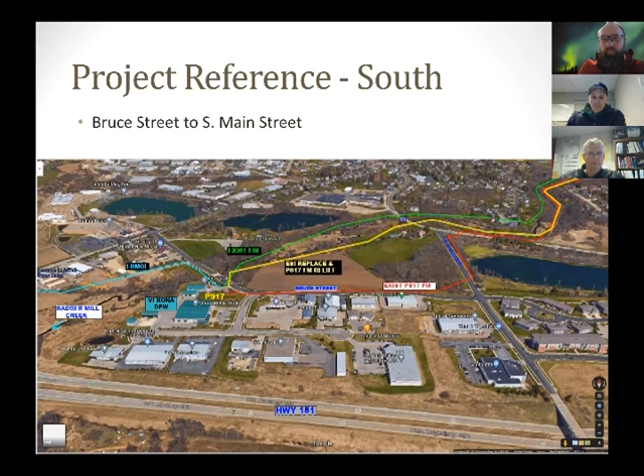And Aaron, I'm going to allow you to take over control here and go over where things are at out in the field. So I'm going to make you the host here, bear with me. There, it looks like I'm the host. Here, let me share my screen.

You should be seeing a marked up picture of the project areas. Starting on the south end, near Bruce Street to Main Street, the Interceptor and the Force Main are complete, except for little short stretches shown in blue. The Force Main needs to be connected to the crossings under South Main Street. As of today, those crossings are complete and were filled with cellular grout, finished about noon. The creek crossings for the local connections have been completed, but once the whole Interceptor sewer is in, they can be connected to the local crossing, so they're essentially just stubbed across right now.

In the next month or so, depending on weather, restoration is planned to begin along Bruce Street and then work towards Main Street. That's seed restoration along the pipe trenches and construction zone, as well as restoring the Bruce Street pavement, putting in permanent pavement and sidewalks. That will include a closure of Bruce Street anticipated for 2-3 weeks, date to be determined.

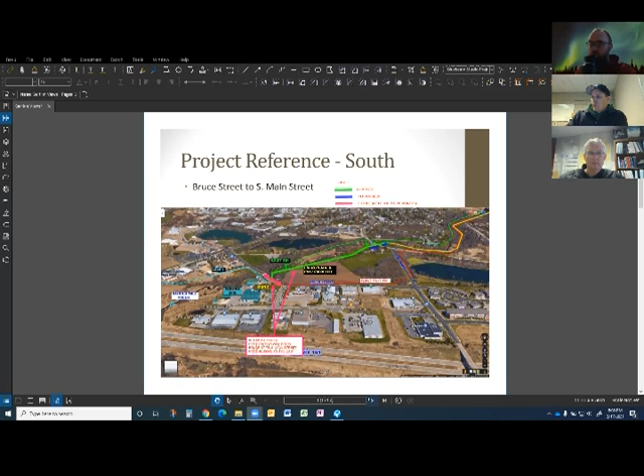As we work north or east from Main Street to Lincoln Street, that's where they're focusing now. Shown in green, that's Force Main and Interceptor sewer that's complete. They have a little bit of Force Main to tie in just north of Main Street, and they're currently working on Force Main in a blue area to catch up to where they have gravity sewer installed.

They are also working on the Melody Circle local connection, placing a casing in the easement area from Melody close to the creek bank or property line. In the next few weeks or so, they're going to cross the creek and connect there. Like the other crossings, they'll make the connection but won't place it in service until the whole interceptor is complete. Moving forward in the next few months, they'll keep progressing towards Lincoln Street, towards the east end of the project.

I anticipate they'll be close to Lincoln Street in about a month or so, give or take. They're still dewatering ahead of the pipe, so they still have a crew placing wells. They anticipate doing that just north of Lincoln Street. And I think that's about it for progress.

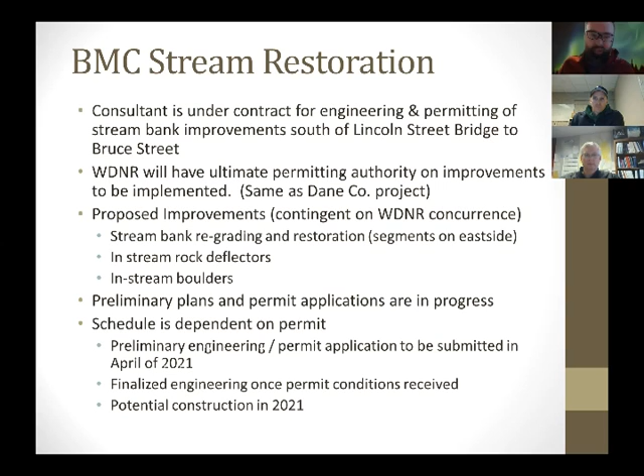Potential construction is hoping to be this year, but that'll be permit dependent and contract dependent and getting authorization to do that work.

The public involvement plan, I kind of touched on that already. Once plans are in place, I'll create a website and upload the plans for input, and then I'll also continue to provide monthly updates at this meeting under the Interceptor project.

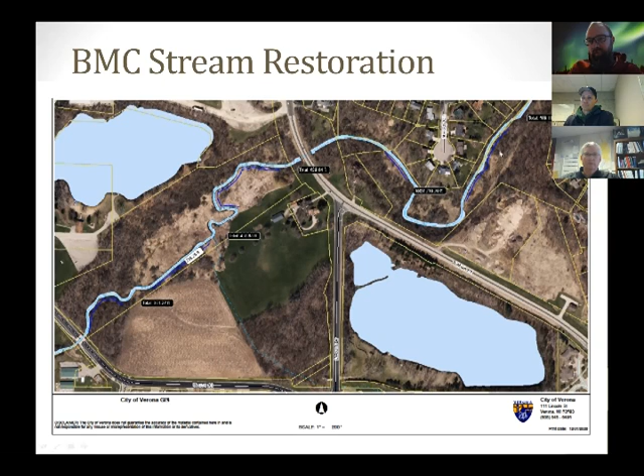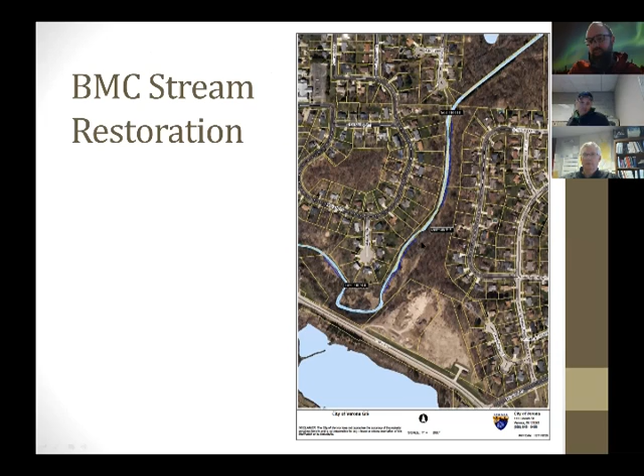The locations again are as follows: from Bruce Street through Main, we're going to focus on the east side or south side of the creek. That's all city-owned property, and each location will be dependent on constructability, site access, and permittability. Going north from Main to the Lincoln Street Bridge, focus on the south side and/or the east side as we move north. And then the area between Melody Circle and Hillcrest is all focused on the east side of the creek.

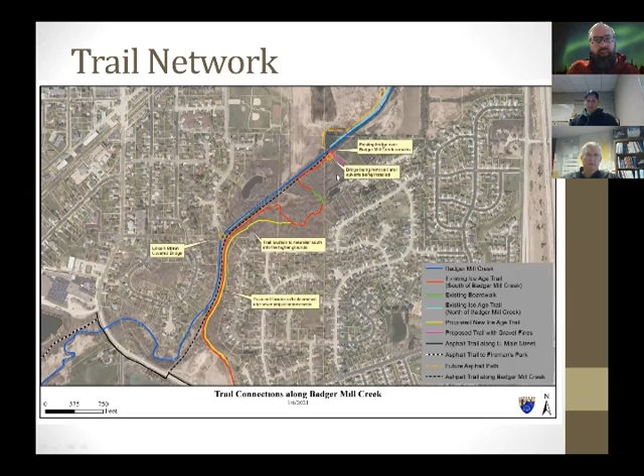The trail network, I touched on this last time. I'm just bringing this up again. For the paved path route, as you can see, that is in the dashed black line from Main through Arbor Vitae, that would be constructed as part of this project. And once again, I just got the meetings where this was discussed at and staff support for it and the overall connectivity for the city.

The park board is meeting tonight at 7 o'clock, I do know, to discuss maintenance elements. And the Public Works Committee has discussed the project at each of the last meetings also. And overall, there's the support from staff for it too.

The next meeting regarding this project will be April 21st at the same time, same Zoom meeting link. I will also get this meeting onto the city's YouTube page. Give us till next week to get that up, but that will be up at the same link as all the other ones on the city's webpage.

For the YouTube, you can get to that through the project webpage or through the city council agendas too. The website information is the same as before, that hasn't changed. And ultimately, Dane County's website has not changed to my knowledge also. At this point, we can take any questions that anyone in the audience may have.